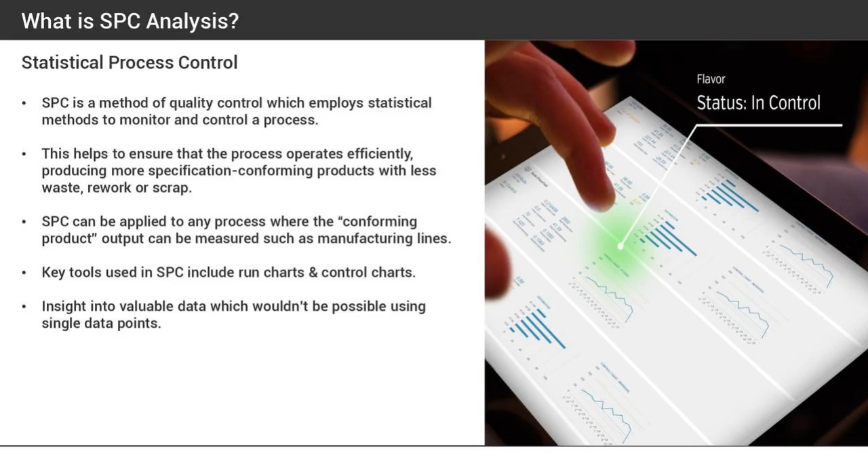And usually all of this data that is collected is just filed away and nothing happens unless an auditor comes along and we need to pull some data or some records out. So with SPC, you can really take the data and see what's happening. Are your processes capable of producing spec conforming products?

So what are the benefits of SPC? Well, it will help reduce variability. We're going to see and talk a little bit about variability throughout the slides today. It can help improve productivity, reduce costs. Again, you're going to be doing less rework. You're not going to have to deal with as many customer complaints coming back in. It can uncover hidden process personalities.

So, for example, perhaps you're producing burgers and they need to be within a certain specification, let's say 10 to 15 grams. But with SPC, you can find out perhaps you may be now producing burgers at the higher end of the spec. So they're all within the limits, but it's on the higher end. So you can uncover hidden process personalities.

SPC will allow you to then react to any process changes that you actually can see and inform decision making and improvements you will gain from this. So really, SPC allows for early detection and prevention of problems, rather than just correcting them after they happen.

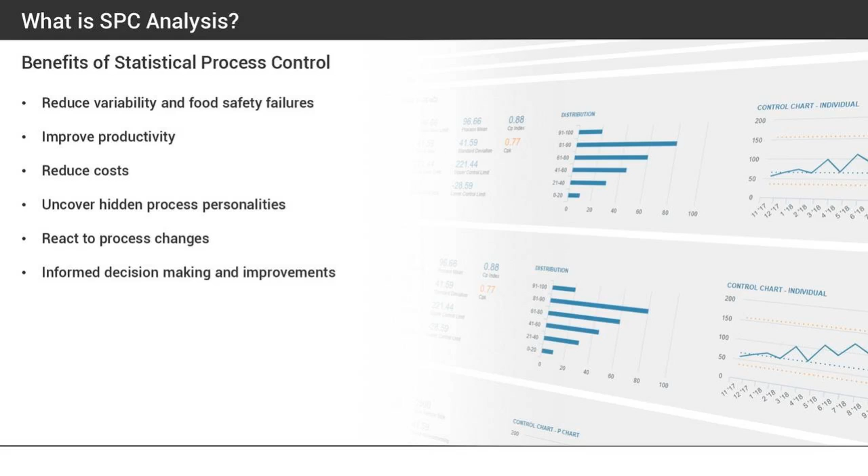So SPC as a requirement in food safety. So recent changes to several standards are actually driving businesses towards identifying and using SPC or other statistical analysis tools to make better use of collected data arising from monitoring and control activities. One such standard is SQF Quality Code Edition 8.1.

So in 2.5.4.3, the requirement there, it discusses that SPC methods shall be used to effectively control and optimize production processes to improve process efficiency and product quality and to reduce waste. It specifically mentions that control charts shall be in use for control of key processes and have defined upper and lower control limits. Now in there it says ±3 standard deviations. We'll talk a little bit about that as we go along today.

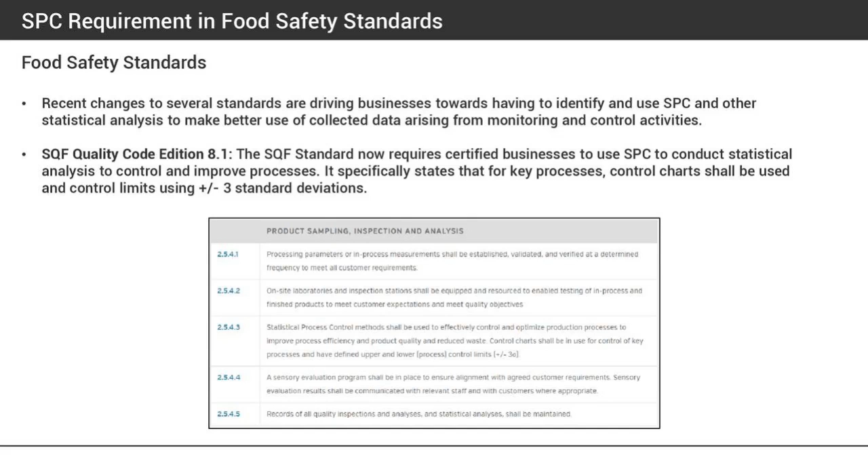SQF is now asking you to employ this and use this to improve your processes. Another such standard looking for you to analyze your data to drive improvement is ISO 22000. Now, it doesn't specifically mention you need to use SPC, but it does say you need to use statistical tools to improve your systems. So we can see now that this is becoming more popular, not just creating products to spec, but driving improvement as well.

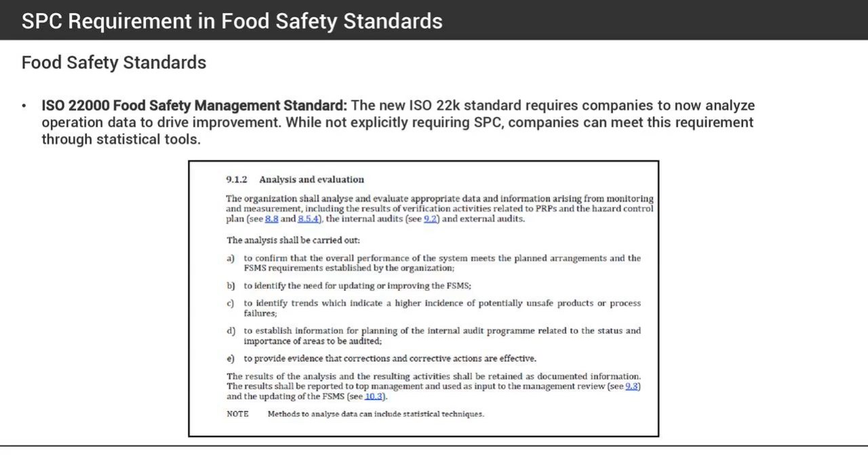And I am of the view that we will see other standards begin to bring this in as well, such as perhaps BRC. So where does SPC come from? Let's take a look. So here we have William Edwards Deming. He is considered the father of SPC. Now, before Deming, there was a man called Walter Shewhart who worked in Bell Laboratories over in the USA. And he came up with the concept of SPC. However, it was his colleague, Deming, who really championed the work of Walter.

So Deming, he is an engineer, statistician, professor, among other things. He has developed sampling techniques which are still used in the US Department of Census and Bureau of Labor Statistics. He's best known for his work in Japan after World War II, where he promoted the use of statistical tools in the rapid development of the Japanese economy and manufacturing industry. And today there are lots of different brands that we recognize as really high quality. And again, it really stems from his work and improving the Japanese economy and the manufacturing industry. So for example, we all would be familiar with Toyota.

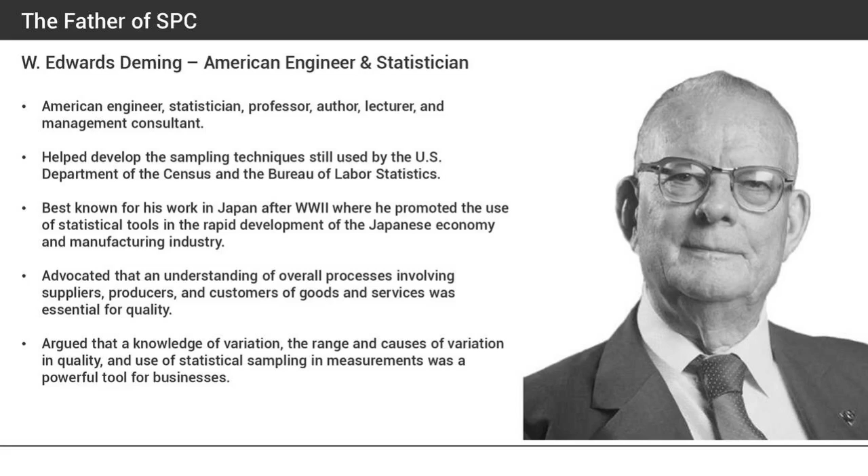So Deming was an advocate that understanding your process and what you're doing is so important. And we're going to talk today a little bit about this here. So it's argued that a knowledge of variation and the range and causes of variation in quality and the use of statistical sampling and measures was a powerful tool for business. And again, we'll see a little bit more today about variation. So what is process variation and process data? So all processes have variation. And variation is the inherent tendency of a process to deviate or move around a central mean point. And Deming mentioned that uncontrolled variation is the enemy of quality.

Now, we find variation all throughout nature: human height, weight, atmospheric temperature, and so on. So if we were to actually line up a bunch of people and take their heights, we'll find that most people fall in around the mean. We'll have some tall and some small people then as well. So variation is all throughout nature. It's impossible to eliminate it, but the objective is to understand and know the degree and nature of variation. And once this is done, it is possible to control variation. So this is what you would employ into your processes, to know and understand the variation of the process.

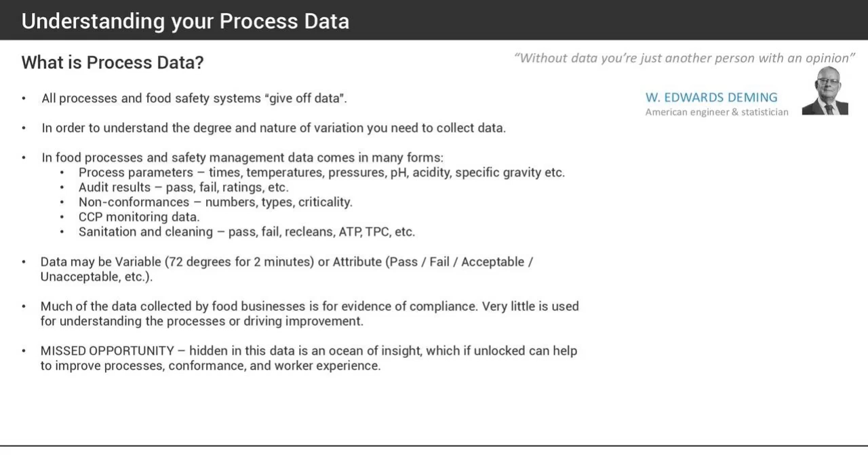And I guess that's where a lot of the GFSI standards are now beginning to realize and bring SPC into it. So there's just a huge missed opportunity with all this data that businesses are collecting. If you were to analyze it, you get a really good insight into your process and what's happening. And Deming said, without data, you're just another person with an opinion.

So what do we measure? Well, in order to understand and therefore control your processes, you need to collect your data. And this means you need to monitor and measure. And this is the principle of HACCP, so Hazard Analysis Critical Control Point. In food safety, you will monitor based on 2 requirements: compliance to regulation and to customers. And then we also have risk. Risk assessment is the key and is reflected in most food safety standards.

For example, thermal treatment process to kill pathogens. It needs to be a minimum time and temperature. It's necessary to determine if, at the set point, the process is capable of achieving the required kill based on variation of the process. And only measuring and collecting sufficient data and analyzing it will allow you to fully determine, is your process capable of always being able to kill the pathogens to the required time and temperature. And Deming said, you can't manage what you don't measure.

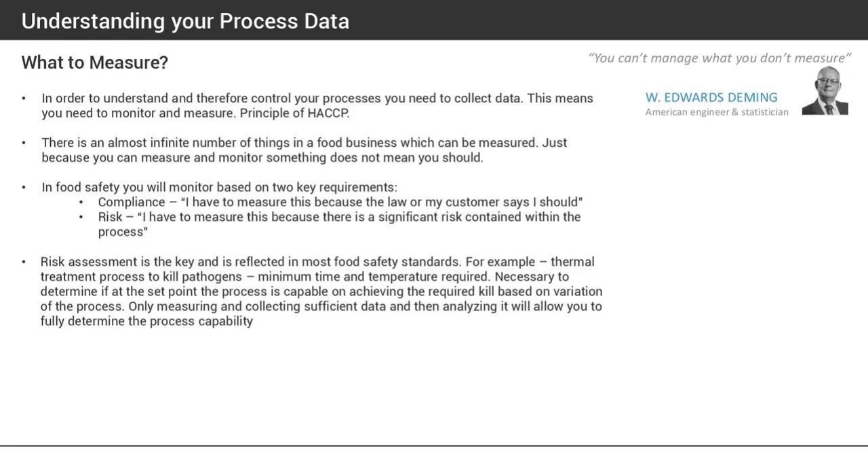So using your data to understand your process. Once you collect your data, either you determine if it meets the specification, and as I mentioned, that's what most people will do, or you can analyze your data using statistical techniques to describe the process in terms of capability to meet the specification consistently.

So let's say you check the weights of 10 burgers every hour. While you might check the weights and they're within the specification, something else may be happening. There may actually be a shift in your process. And that's where SPC comes in to allow you to quickly see if there's a shift or if there's something happening. So just because we're making burgers to the correct weight doesn't mean that our process is capable of always meeting the spec consistently, and that's where SPC comes in. And again, Deming said, if you can't describe what you are doing as a process, you don't know what you are doing. And he is right.

Now, there are some barriers to collecting your data and analyzing it. Yes, you're going to need some tools to help with this. You might need to know a little bit about SPC in order to interpret the data. And yes, it might require a little bit of time, money, and resources. However, the benefit is huge.

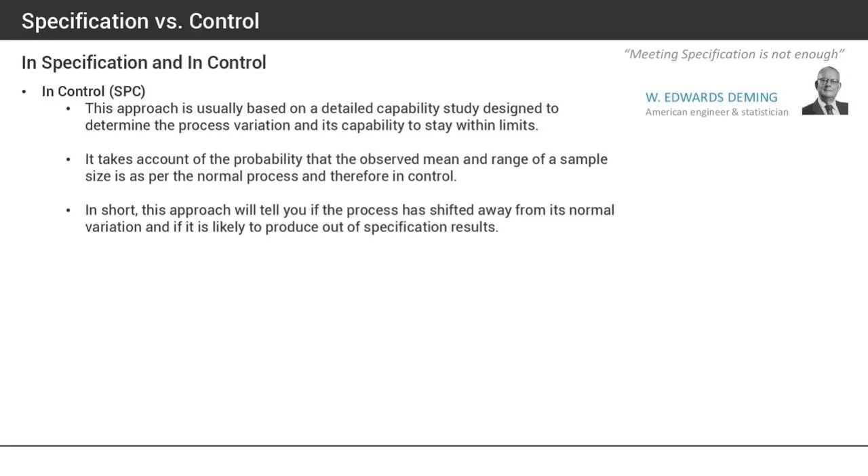So in control, this is all then based around SPC. This approach is usually based on a detailed capability study designed to determine the process variation and its capability to stay within limits. It takes into account the probability that the observed mean and range of a sample size is as per the normal process and therefore in control. In short, this approach will tell you if the process has shifted away from its normal variation and if it is likely to produce out of spec results.

Let's take a look now at control charts. And before we do that, basically, what does SPC like? Well, SPC, or Statistical Process Control, prefers not to use single test data. So what does that mean? Well, let's say we are checking the weight of burgers coming off a line, and every hour we check, let's just pretend, one burger. So that's really a single test data point. What SPC likes is to work with bigger sample sets. So maybe every hour we need to check the weight of 15 burgers. It likes to have big sample points.

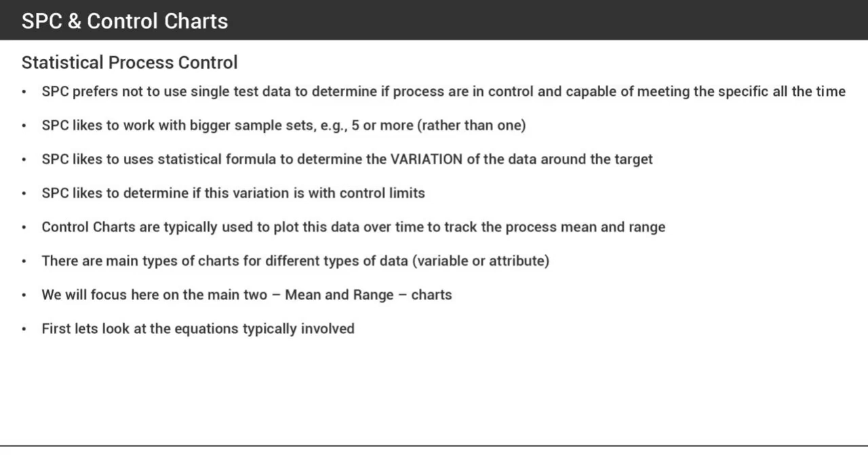SPC likes to use statistical formulas to determine the variation of the data around the target, and also to determine if variation is within control limits. Control charts are typically used to plot this data over time to track the process mean and range. As we mentioned already, there are different types of charts for different types of data. For variable data, we have an X-bar chart or mean chart, a range chart, and also an S chart, which is a standard deviation chart. For attributes, we have what is called a P chart. As I said, we'll focus just on mean and range today.

So here's an example on the top of a mean chart, or an X-bar chart, as it is sometimes called. And on the bottom is a range chart. So with SPC, let's pretend you collect data. If we put this data in and create an X-bar chart or a mean chart, and then we take the same data and create a range chart, they could tell a different story.

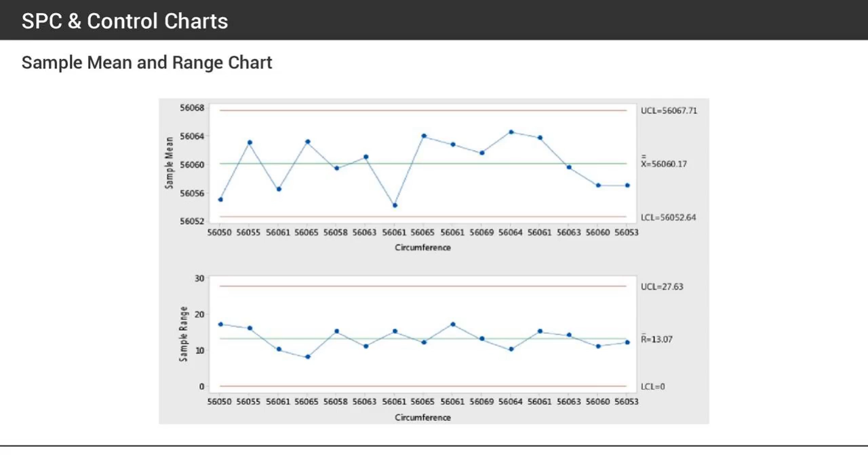So let's take a look now at some formulas that we might usually see within SPC. We won't go into great detail, it's just to introduce these to you. Here we have N. This is the number of samples or test readings taken at a given point. We have mean. This is the formula for mean. It does look quite complicated, but we need the mean when we're doing SPC analysis. The mean is when you take all of your results, add them up, and divide by the number of sample points that you have.

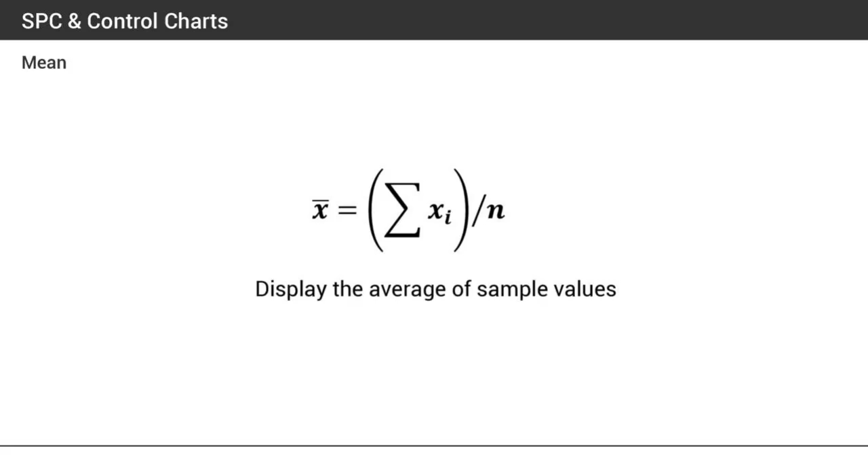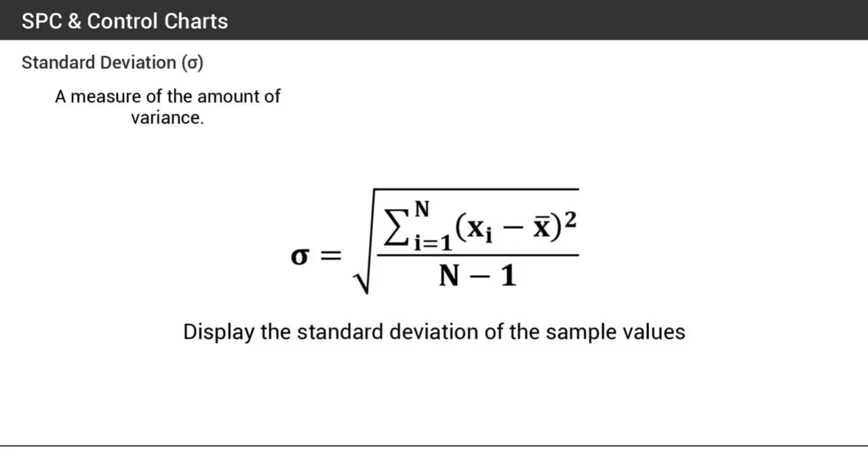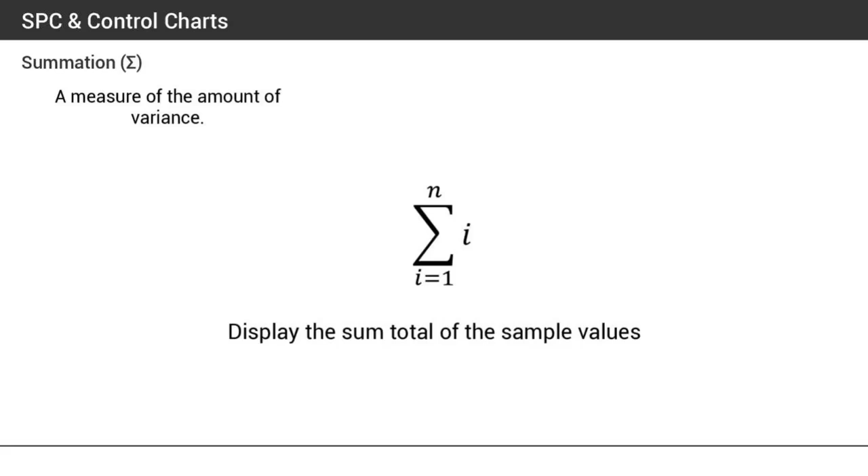Next, we've got range. What is range? Well, let's pretend you check the weight of, let's say, 20 burgers every hour. To get the range, you take the lowest value from the highest value, and you've got your range. Then we have standard deviation. Standard deviation is the measure of your results around a mean central point, so it's basically the measure of variance around that mean. Summation: this is just the total sum of all of your values. So these are some formulas that are usually used within SPC.

So control charts will allow you to answer certain questions, such as: is my process stable over time? What is the effect of a process change on the output characteristics? And how will I know if the process becomes unstable or the performance changes over time?

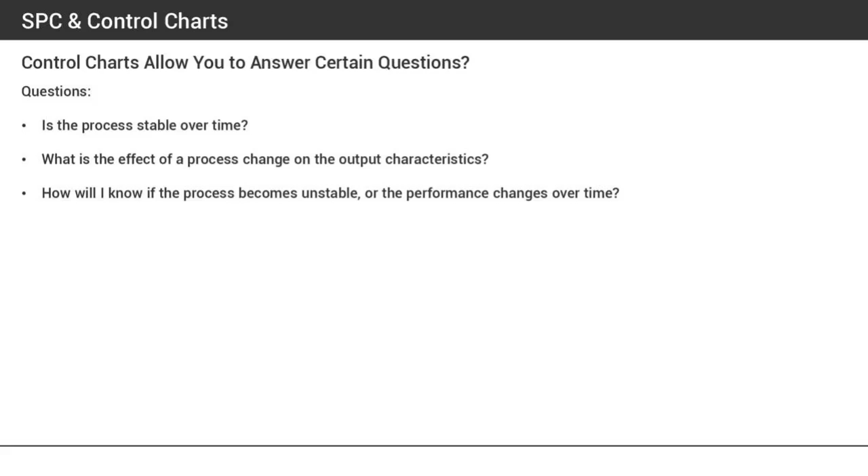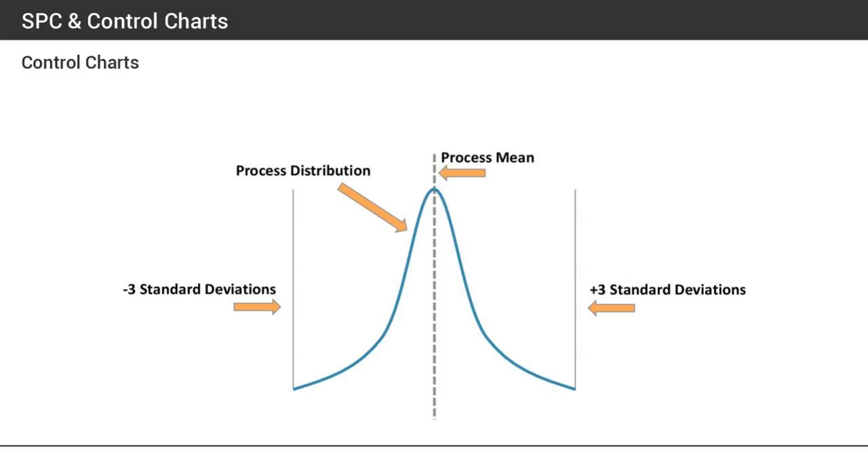So here we have it here. This would be an example of, let's say, as I said, maybe you come along every hour and you check the weight of your burgers. So the data will be plotted along here, and then you'll begin to get a trend. On the top, we've got your upper limit, on the bottom, the lower limit, and in the middle, the mean.

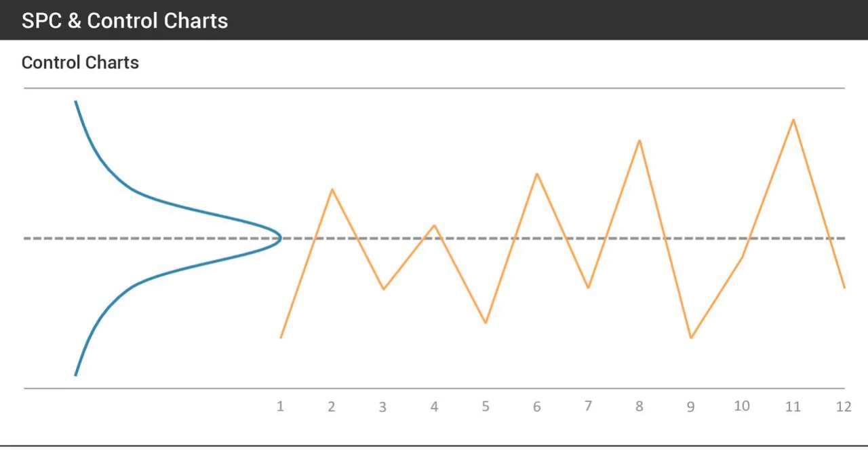So as I mentioned earlier, with SPC, there are lots of different charts. Usually we have an X bar and an R chart. These are used. And here we can just see that we've got the upper control limit, central line, that's the CL, and lower control limit. Now, these aren't upper spec limit and lower spec limit. This is upper and lower control limit.

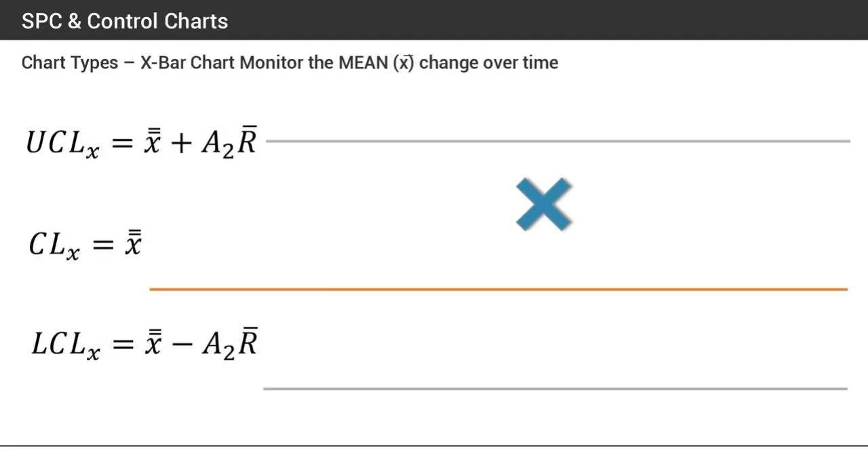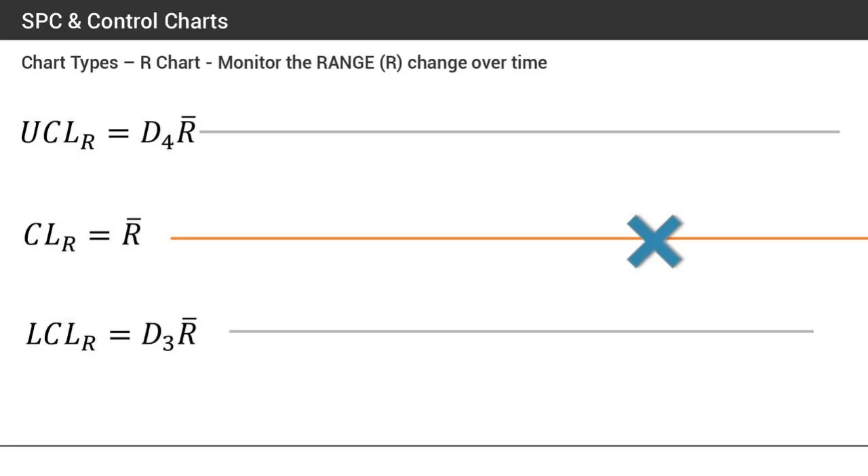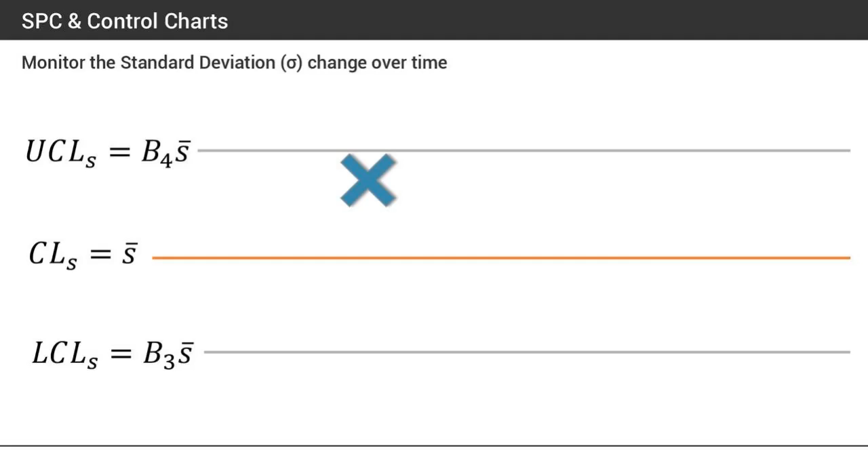So again, with the analysis, this is basically your ±3 standard deviations. That's what this is. And if you were collecting the data, there are formulas to allow you to calculate all of this. So next, we have here the range chart, to monitor the range and change over time. Again, we've got the upper control limit, central line, and lower control limit here. So the results are just plotted in here. There's also standard deviation. So in here, again, we've got the upper control limit, central line, and lower control limit as well.

So let's actually now look at this in action. So what would an SPC report actually look like? So we have, first of all, data type. Is it variable or attributes? Depending on the data type, you use different charts. We've got status. Is it out of control or in control? And sample size. Now, depending on your sample size, you'll use different charts.

Then we have the spec limits, so the specification limits. So here we've got the upper spec, 205, target 195, and lower 185. And at the bottom there, we have standard deviation. As I said, the standard deviation measures the average spread around the mean. We've got the CP index and CPK index. These are important. This is the measure of how capable your process is

on producing spec-conforming products. Now, we won't go into too much detail, but CP is all about capability to produce within the upper and lower spec limit. Whereas CPK is a little bit more about performance. Yes, how capable are we to produce within the limits, but how capable are we to actually produce to the target as well?

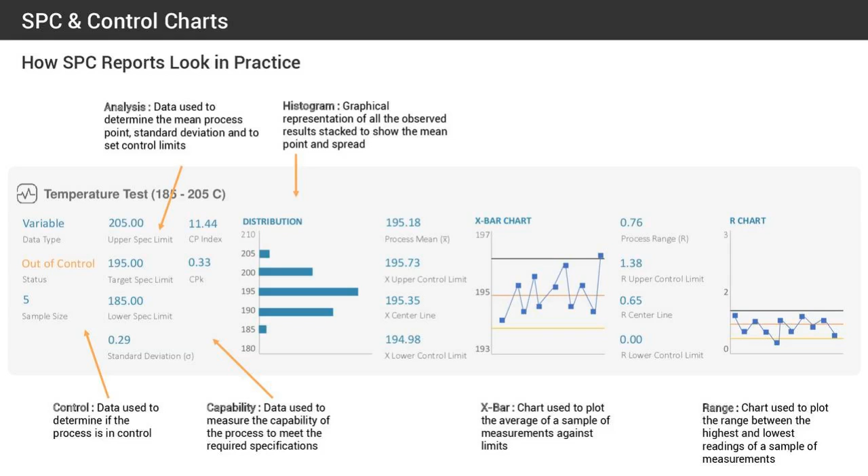So I want to talk to you and go through conducting cleaning validation, because you can employ SPC to validate your cleaning. So if we were to do that, what do we need to begin with? So first of all, you need to do some pre-validation tasks.

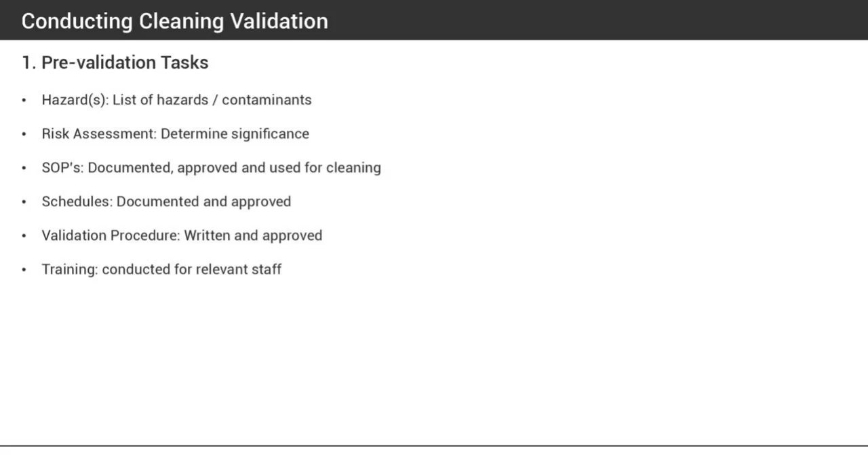So identify your hazards, listeria, whatever it may be, the risk assessment, prepare your standard operating procedures or your sanitation standard operating procedures, prepare cleaning schedules, validation procedures, and of course, train everybody who will be involved in the cleaning. So that's where you would begin when conducting cleaning validation.

Next is the approach. You need to make sure you collect data, scientific data. Data on hazards and risks, legislation, very important to do your due diligence on chemicals you're going to use, and how you're going to analyze the data, say maybe the swabs that you take.

Then we have parameters and decision criteria. We need to define the microbiological, allergen, and other relevant criteria necessary to consider SOPs to be validated. Then we can conduct the validation activity. So implement your SOP for a specific period of time. So let's say 3 to 4 weeks, which might be 10 cleaning activities. Then we need to do the testing of food contact surfaces after cleaning and disinfection.

Next, then we analyze the results. We collate the results and we conduct appropriate statistical analysis to determine the variability in efficiency of the cleaning SOPs. Basically, a capability study. So how capable are we of doing the cleaning and it being effective? Let's actually take a look now at a capability study for cleaning. And of course, there's going to be one of two outcomes. We're very capable or not capable. If we're capable, then we validated our cleaning.

So when you're doing a capability study, first you'll define your upper and lower spec limits. We got 0 to 200 RLU here. And what is the target? Then what you do is you will obviously do your cleaning, then do your swab analysis and plot the results each time. So hopefully when you do this, you will then begin to see a trend. And you can see here, there's a slight bell curve.

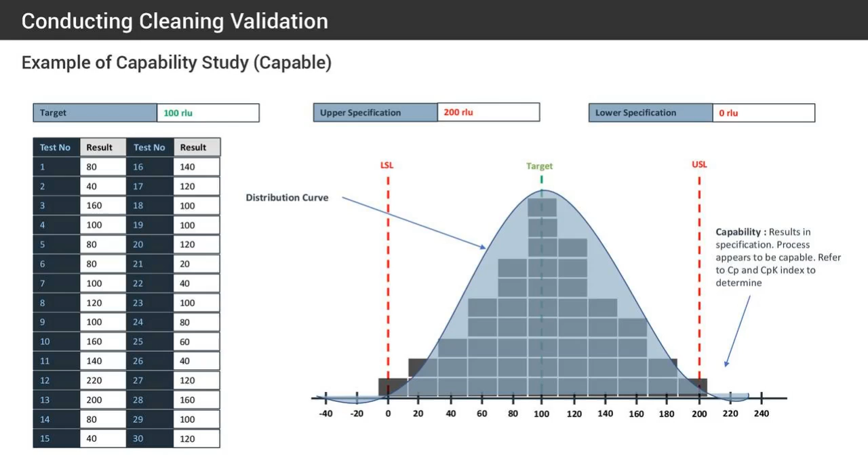However, if we take a look, we are getting results outside of the specification limits. So we can see to the left and to the right, there are some results that are outside. So this is an example of where it's just not capable. And here is an example of where we are capable of conducting the cleaning and it working for us. So everything is within the upper and lower spec limits. And in terms of capability, CP and CPK index is what is used. We saw that just a moment ago.

So when you're doing a capability study, you can use lots of different tools. For example, Excel with built-in formulas that you're doing your validation, and as you get a result, you can plot it in here, and it will then pop up in the graph. And also with formulas in here, you'll be able to find out what's your CPK, CP index, and so on. Now, I won't go into too much detail, but for CPK, ideally this would be around 1.33. And then for CP, ideally it would be in and around 1 or bigger than 1.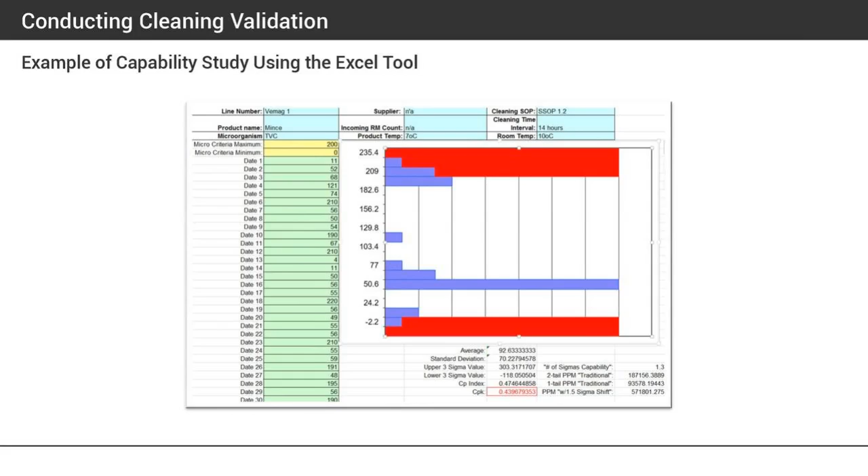So then after all of that, you need to document the data in a validation report and prepare it so we can clearly present all of the information. And then in conclusion, if results indicate that the sanitation standard operating procedures are capable of consistently delivering results that comply with the established criteria during the period, then the cleaning SOP can be considered effective and validated. And if results indicate that it's not capable, then we'll need to consider the SOP ineffective, and maybe we'll then need to improve on this. So maybe recommendations should be made to redesign the SOP and repeat the validation procedure.